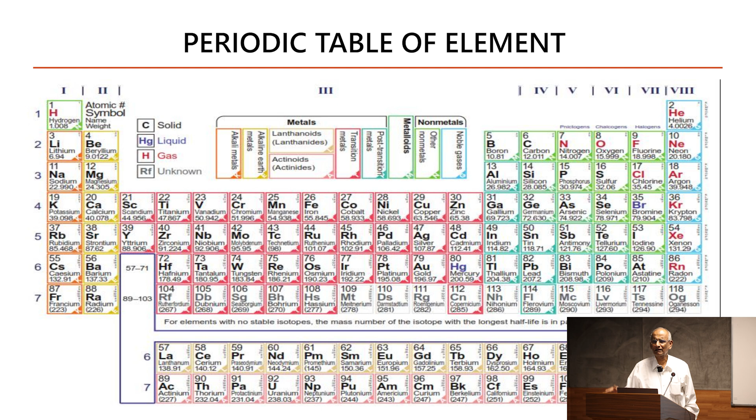Okay, now why I say that, give the periodic table - these are all the materials available, right? We were taught in college or PUC level that all the left sides are metals, right side are non-metals. Okay, next one. How does it matter to you?

In engineering, various materials have to be used, right? The material does not have any value if it is not used. You are sitting in the chair because it's built up of materials. So how do you select the material?

First, stability of the material in the given condition. You are sitting in the chair - it may have to carry a person of weight of 25 kg to 1.25 quintal or 1.45 quintal, right? Whether it has stability in the given condition.

Second, ability to withstand the mechanical forces from various sides. Third, suitability of the performance at the given temperature.

Why do I say specifically this? Okay, in your factory you may say, yes, this is the material I selected, so and so. You know, many guys, when they go abroad, they have a fancy of bringing many equipment or household active products to the country. Even now our white man's craze has not gone out fully, even though the government of India is trying to talk about quite a lot about patriotism.

So many of you go abroad, your house people, wife or girlfriend will say bring me that, bring me that. What happened? Those are all from cold places where temperature is very low. When it comes to India, it will not work. You have to show a bad face. So suitability of the performance at the given temperature - that is the most important.

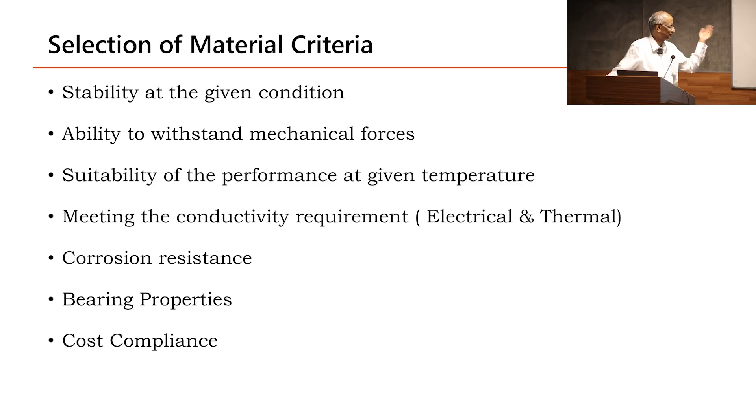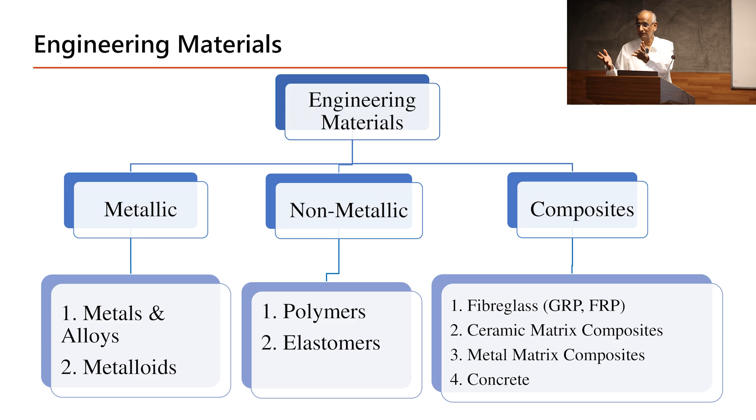When you talk about engineering materials, you have got both metallic, non-metallic, and composites. In the metallic, you have metals and alloys and metalloids. Non-metallic, you have got the polymers and elastomers. In the composite, typical example is fiberglass, ceramic matrix, metal matrix, and concrete. This is a very classic example of composite - you don't need to go anywhere else to see what the composite is.

Next one. See, why all this, you will understand - every material what we use is taken from the Mother Earth. Everything is available here. So the percentage I have given you is taken from some book or something like that - it may be accurate, it may not be accurate, but it represents the source by and large, right? These are all the metallic materials available.

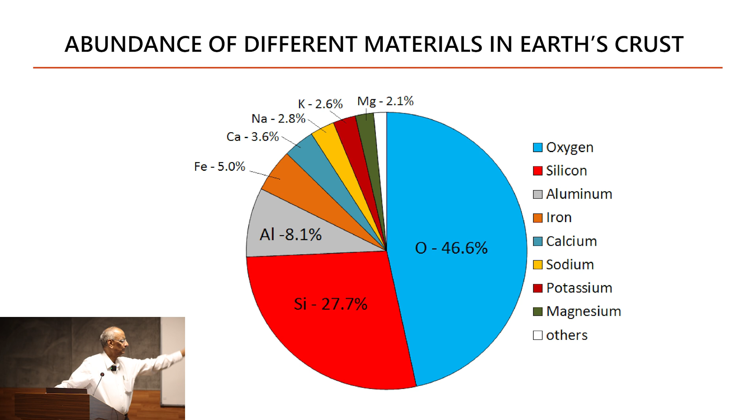Why did I give this? I will take you back to your school time, maybe 8th standard or 9th standard. Why I specifically do this is, do you remember what was taught in 8th standard, 9th standard? That is what I want to inspire you to recall, right? In the 9th standard, you find the definition of metal: any metal which is put in dilute acid should evolve hydrogen - that is the definition of metal. Probably the modern definition of metal would have changed quite a lot, but this is the one taught in school.

And what is the aspect of the property of the metal? Malleable, ductile, electric conductivity, thermal conductivity. Now you have got electronic properties, etc., etc., etc. These are all the basic things we were taught in schools. How many of you remember this? Everybody is sleeping - one fellow is yawning, another fellow is sleeping, right? That is the outcome now. Right, next.

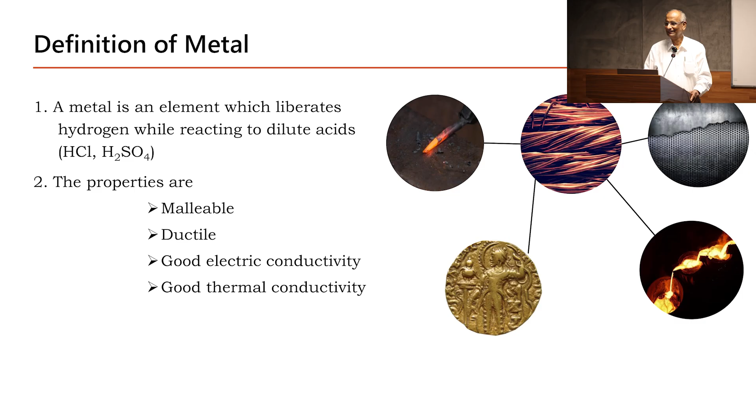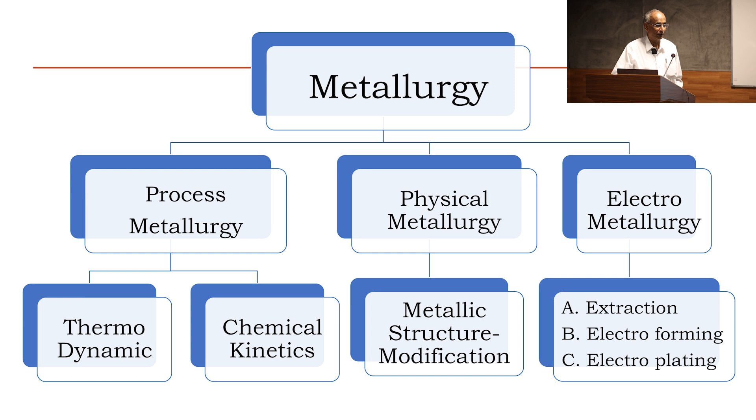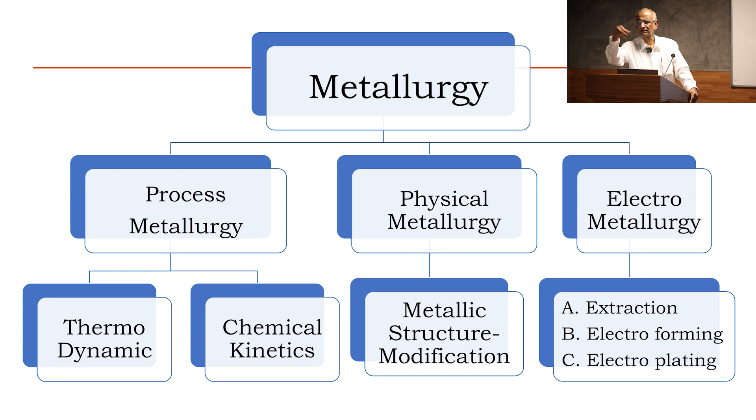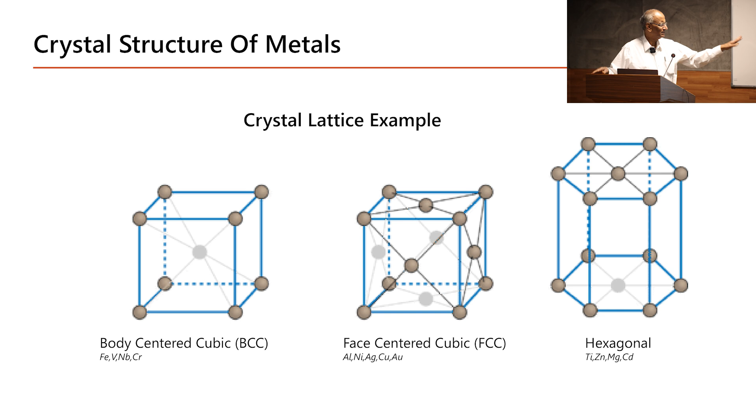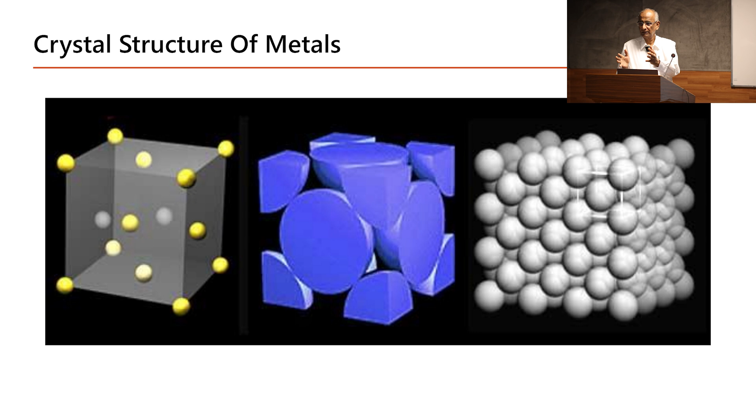Moment you talk about structure of the metallurgy, metallic materials, basically you have body-centered cubic, FCC, and hexagonal, and something more also, but this is the most popular one. This is what it looks like when you talk about the metallic structure, which is neatly organized.

See, this is what I want to do, because most of your industry guys will be dealing with iron-based material. Particularly, you have some lectures about heat treatment today, isn't it? Right? So most of the heat treaters will say quenching it, hardening it, tempering it, etc. These are all the words they use. They don't use the word of why it is happening - not many of them talk about that. And everybody thinks in the mechanical sense that when you heat to so and so temperature and quench it, it will become hard. No, that is not for all the materials.

So typically, normal iron has ferrite and austenite. I'll come to the ferrite and austenite separately when you come to heat treatment. When you have a heat treatment lecture, you ask him at the time, I'll give a small dose on that.

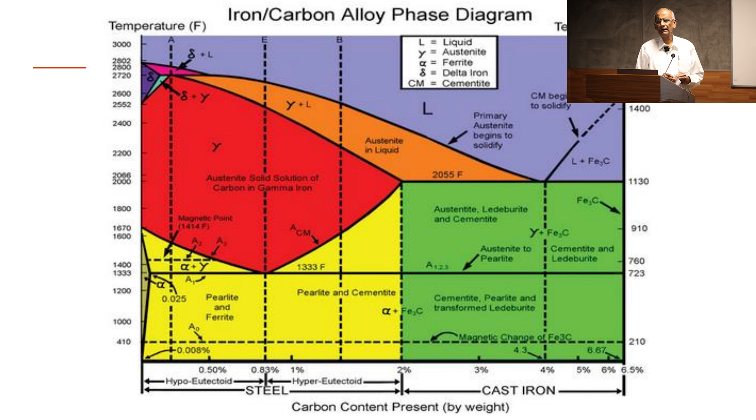When you talk about heat treatment, the heat treaters base it all on ferrous heat treatment, basically based on the iron carbon diagram. Anybody going out of engineering college, mechanical engineering also, will talk about the iron carbon diagram, particularly useful for understanding how which phases contribute to which one. Go back to the previous slide.

When you come to the iron carbon diagram, you hear so many words like pearlite, cementite, martensite, bainite, etc., austenite. These are all the normal terminology heat treatment people use. Why I am asking specifically - the guy who gives a lecture today in heat treatment, if you want, you can weave this into his heat treatment process.

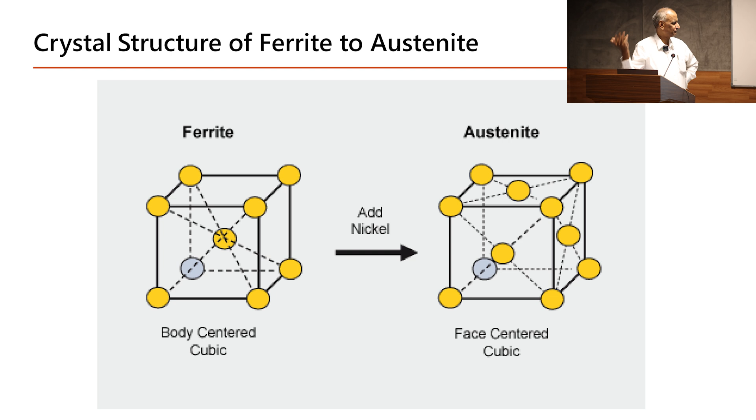For your information, austenite is a phase - when you quench it, it retains the high temperature structure, it doesn't get hardened. So the normal ferrous structure you have is ferrite and bainite, that is what gets hardened. Another one is formation of martensite. Each one has got a crystal structure - if you want, later you ask me, I will tell you.

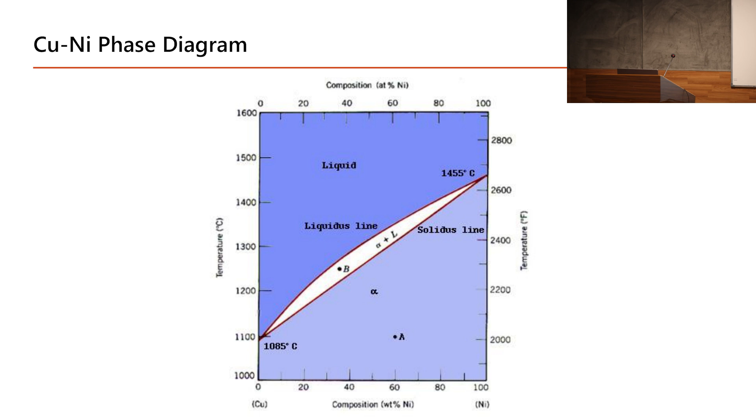So I'm typically showing something - for example, if you look at it, it is the copper-nickel system. Whatever you see here is the liquid area, whatever you see here is the solid area. So you talk about liquids and solids. I don't know how many of you remember, doesn't matter. So when you look at the solidified structure, this is the phase structure. You will have liquid, and it will mix uniformly or non-uniformly also.

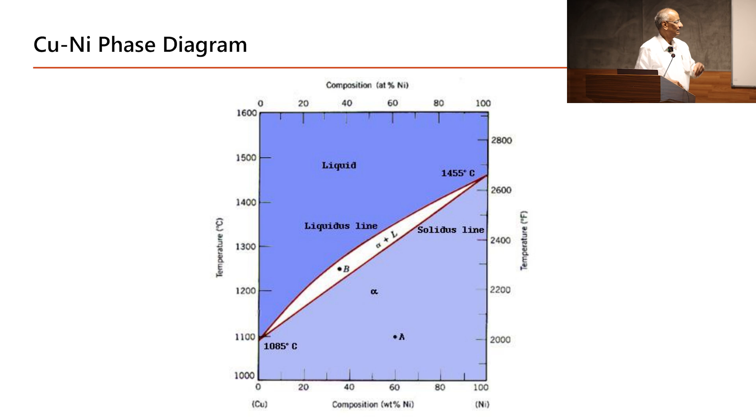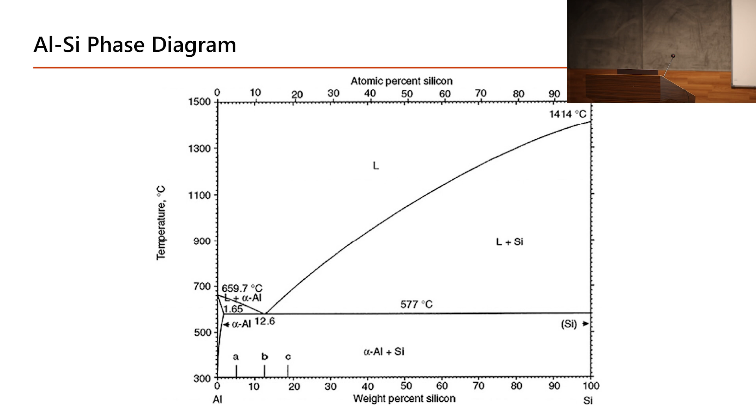And the earlier phase diagram I talked about was the iron carbon diagram - that talks about how the phase diagram decides what microstructure you will have at room temperature, and what type of structure you would like to have depends upon how fast you cool it, how fast you heat it, etc. So I talked to you about the iron-carbon phase diagram, and a totally mixable two-alloy system is copper-nickel, which I showed. This is another popular one, aluminum alloy, aluminum-silicon alloy, and this is known as eutectic - that is the lowest melting point.

What happens when you quench this alloy? From here you bring down the temperature, it will have that phase as well as this phase. Now with Google you can get the phase diagram of any material you have.

So whether these two materials will form an alloy, open the phase diagram whether available or not. That's all what is required. You got my point. I'll tell you one more example.

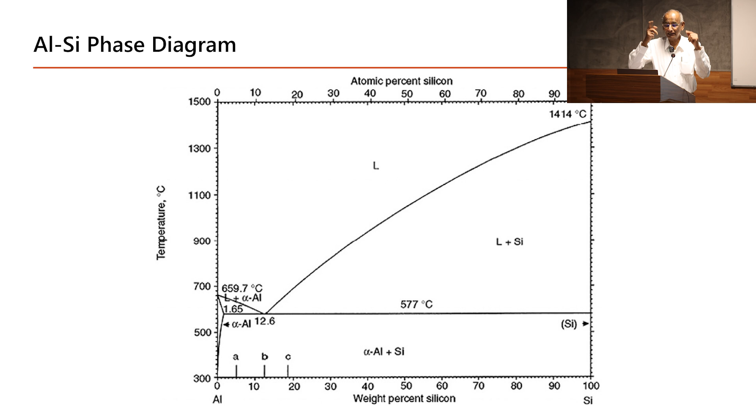In the aluminum foundry, when you go, they degas it. What for they degas? They remove the hydrogen, because hydrogen is soluble in the liquid aluminum, insoluble in the solid aluminum. So it forms the bubble. So what they do? They degas it with the nitrogen or chlorine. It forms a bubble and the hydrogen ions comes in the bubble and come out.

Why nitrogen? Nitrogen does not dissolve in the liquid condition as well as solid condition, so it is used as a purging agent. So this sort of common sense you should have. See, this is why I am telling you, this is all the basis. I don't know whether anybody talking about the foundry today. If it is there, you ask that question.

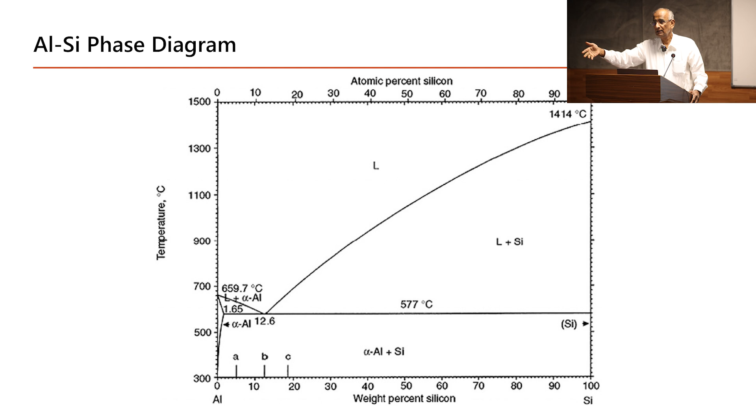So this is if you go to the foundry, somebody using so and so, this is the purpose. And many times they use the argon, but argon is very expensive. They use the nitrogen or chlorine, whatever it may be. Go to the next one, right?

So you get into the two normal terminology, is quenching and age hardening many times. What is age hardening? When you, this sort of a thing, you add some magnesium silicon forms a small precipitate. As the temperature increases, it grows into the microstructure and becomes stressed, so it becomes age hardening. So this is all basically because of the movements of the atoms or the precipitates which various take.

When somebody talks about heat treatment, talk to them about what is martensite, why it's happening like that. Okay, if you quench the aluminum, nothing is going to happen. It's not going to become hard or anything like that. It is only high temperature structure it's going to maintain. Okay, next, go to the next one.

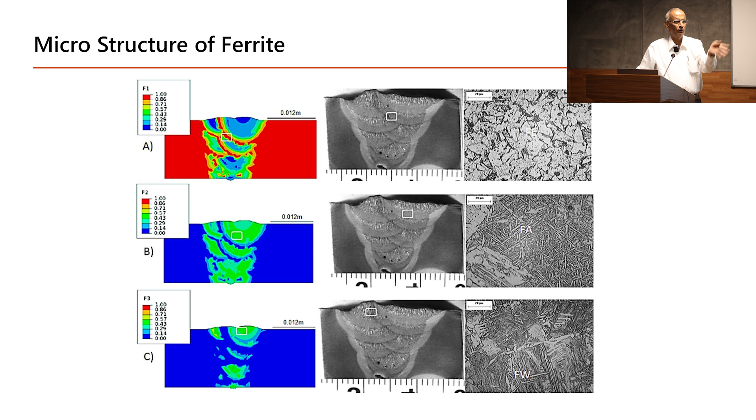These are all the different types of the microstructure. What, as I told you earlier, in the iron you talk about the ferrite, austenite, etc. That structure is like this.

There is a Professor Avik, a fund of knowledge, internationally recognized great man about the microstructure. And for him, you tell various elements and the composition, he will tell you what microstructure is going to be. He got a model, a very great man. Later, when you want to interact, you can come to him, provided he has got time.

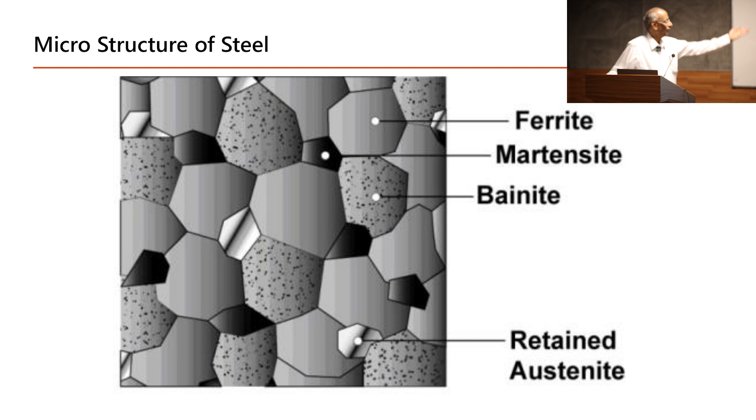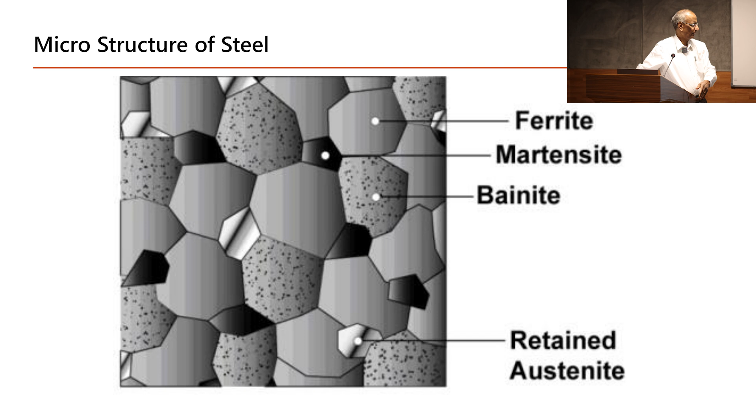Am I right, Avik? Next, okay. See, for you to read what looks like ferrite, what looks like martensite, what looks like in the microstructure, you talk about nearly about 800x magnification, right? You see all this. What is retained austenite, etc. Go to the next one.

Typically, aluminum silicon microstructure, what I told, magnesium silicon system precipitation. Next one.

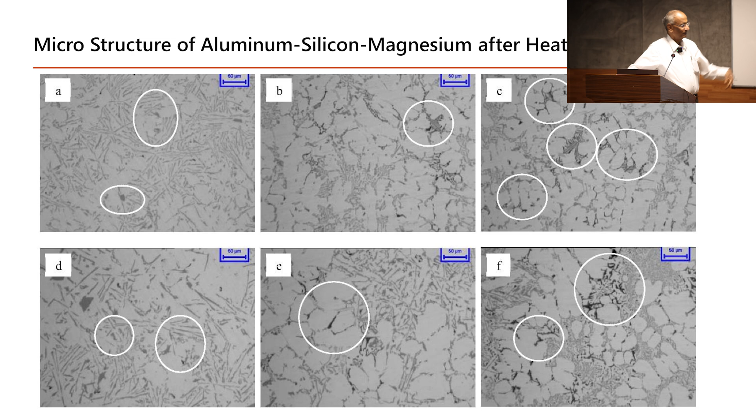In the modern time, in the iron, you have got, very often you hear duplex steel. See, normally you hear about what? MS and mild steel and various low alloying steel, EN8, EN24, etc., etc. You have some ASTM specification.

Then you come to stainless steel. Stainless steel, as a definition, it doesn't form a stain, it doesn't get corroded. There, again, stainless steel you have austenitic stainless steel, like 316 and 304, martensitic stainless steel. So for you to understand simply, any 300 series, this thing, austenitic stainless steel. So when your boss says 300, when he takes the 400 series stainless steel, you say no. The 300 series is austenitic stainless steel which can't be heat treated. 400 series is the martensitic stainless steel, can be heat treated and get into the various hardness.

And the third variety is available, duplex steel. You have ferrite and austenite mixed together. It is highly corrosion resistant. When you talk about corrosion, I'll tell you there's one PREN number, just remind me, I'll explain to you at the time. Highly corrosion resistant, high strength, etc., is a cost compliance.

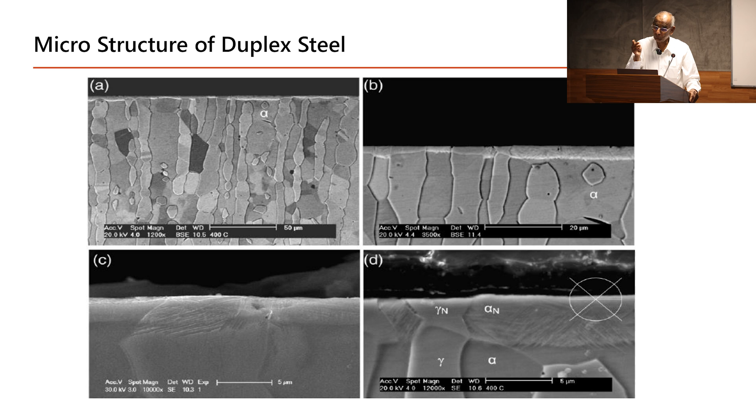Now a lot of laboratories are there, you go there, here they give microstructure, right? Go ahead. And some laboratories really qualify, somebody may not qualify, because the qualified man would have gone outside in the day. Next one.

Now you have modern materials like titanium, which you would not have heard about 25 years back. See the structure of that, various microstructures should thrill someone who is interested in microstructure, seeing the various patterns. You should be able to predict what type of outcome and what type of properties you can expect out of it. Go ahead, next.

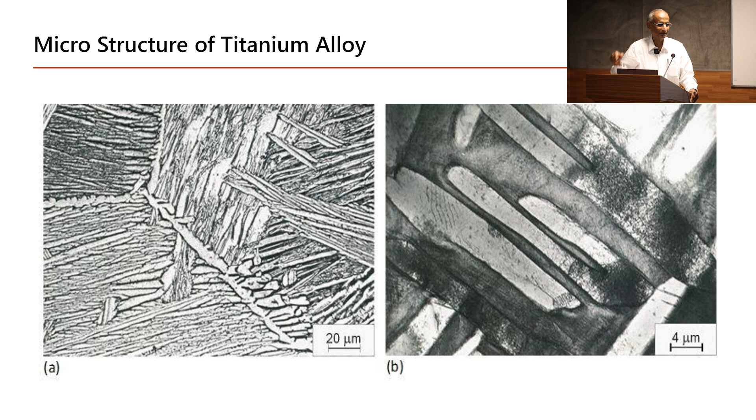Various types of microstructures for you to see. Have a look at that. Go ahead.

Next, okay. Now coming to the engineering operations, various things that engineers basically do. Casting you have, welding you have, metal forming, heat treatment, machining processes, advanced manufacturing processes, forging, extrusion, additive manufacturing, electromachining.

Additive manufacturing, PVD, and injection molding of metal. I will just take about 30-40 seconds on each one of these. Casting, as you know.

You melt the material, maybe pure material or alloy, whatever composition you want, and you use what they call a grain refiner and degassing, whether it is copper, then pour it into the mold.

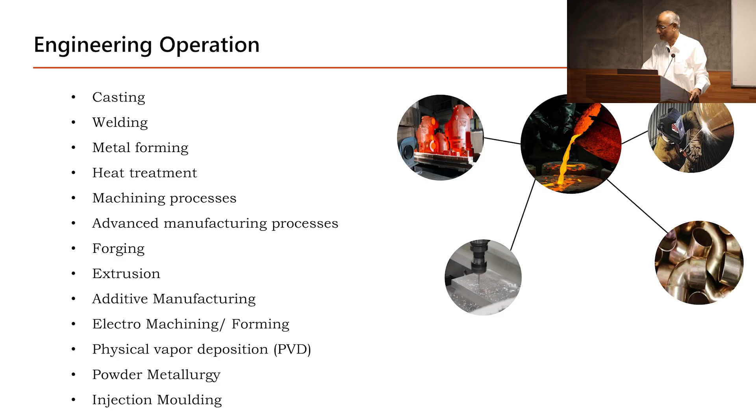Now the engineering operations, as I already talked to you about - sand casting, permanent mold casting, investment casting, squeeze casting. Squeeze casting, I don't know how many of you have heard of it. If you have doubt about it, ask me later during tea time or coffee time. So what is it that you expect? You expect a defect-free casting. This is in that order.

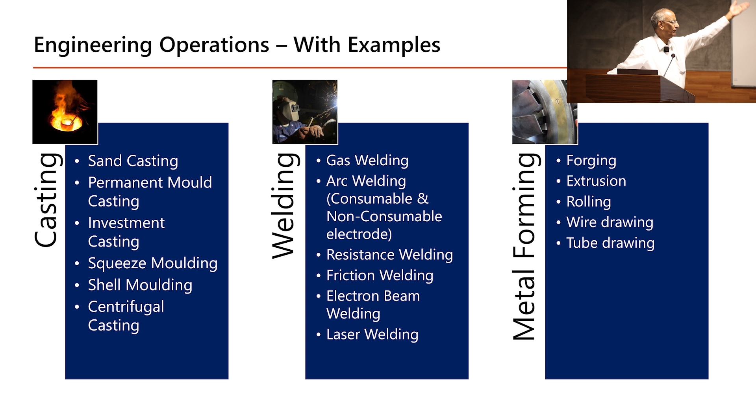Centrifugal casting - how this uses centrifugal force to splash the liquid metal one layer after another, so that the cooling time is very fast, giving a good microstructure with very little defect. A variety of welding processes I have given there. Forging also, at the other area of metal forming, is given. Next - but just keep on looking at me.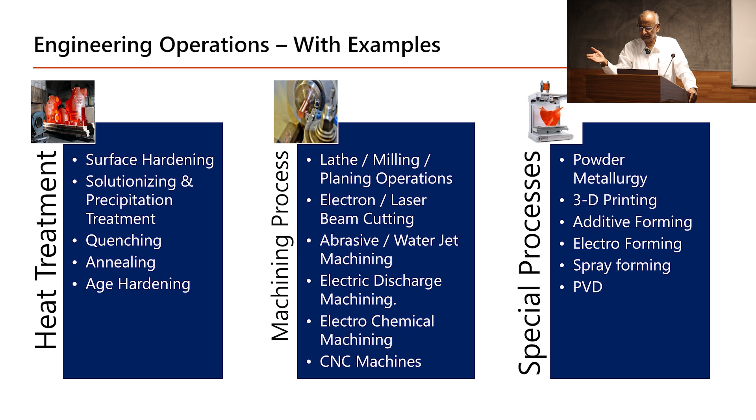There's one more thing I missed until now - spray forming also is there. Somebody is talking about metal spray, isn't it? Ask them those questions. Thermal spray - you'll understand that it's a new technology.

The normal metallic materials - whenever you talk, these are all the values you talk about: what is ultimate tensile strength, what is the elongation, whether it suits me or not, what is the hardness where I require it, whether it gives enough abrasion resistance or wear resistance. Fatigue - how many of you know the terminology fatigue?

One, then two, good. Fatigue is a very important terminology. You know, when you run, initially you'll run very fast, then you become tired - that is known as fatigue. It's a metal fatigue, a tiresomeness of the metal, particularly in terms of alternate stress and strain - the fatigue will be aggravated. Is somebody talking about fatigue today? But you are talking, I see. So especially in rotary shaft designing, etc., the fatigue factor should be taken into account both by mechanical design as well as endurance tests.

Right, fatigue. Creep - how many of you know? Creep, good, it's a time-dependent deformation. The day when you put it, you will not see it immediately. This you see very often - many people in the house put a thin wire for drying clothes. After some time, it will keep on sagging. That is creep - a typical example I'm telling you. Then electrical conductivity, thermal conductivity, etc. You missed the temperature - yeah, that's true. So these are all the normal engineering properties which you have to think about.

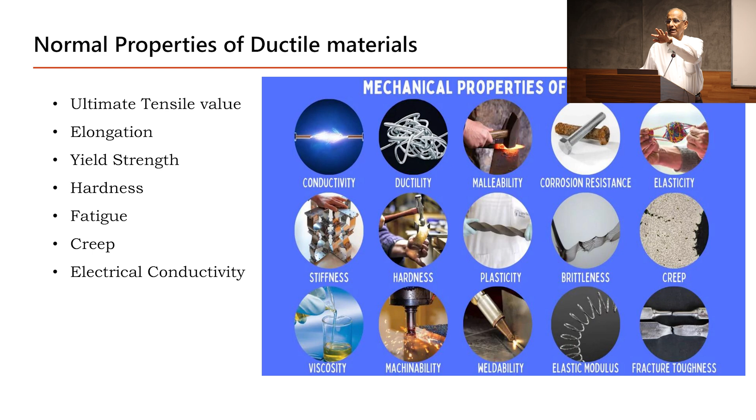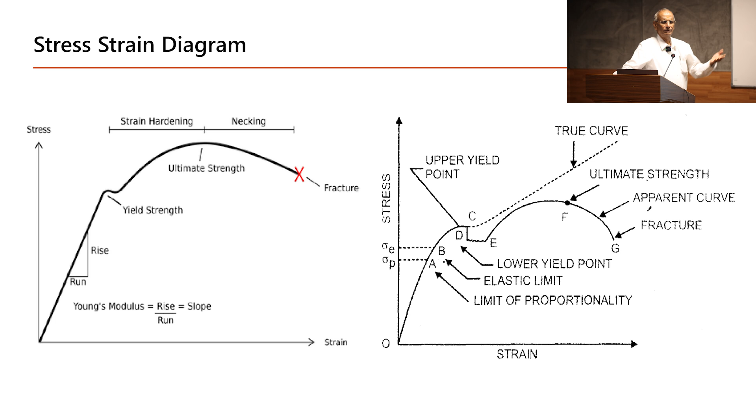Typical stress strain diagram, I want you to have a look at it. Many materials, when you select for your application, calculate the load, whether it's suitable or not. Earlier we had to run to the books to get the stress strain diagram. Now everything is available on Google. Please utilize that for selection of materials. By and large you all know, but read it.

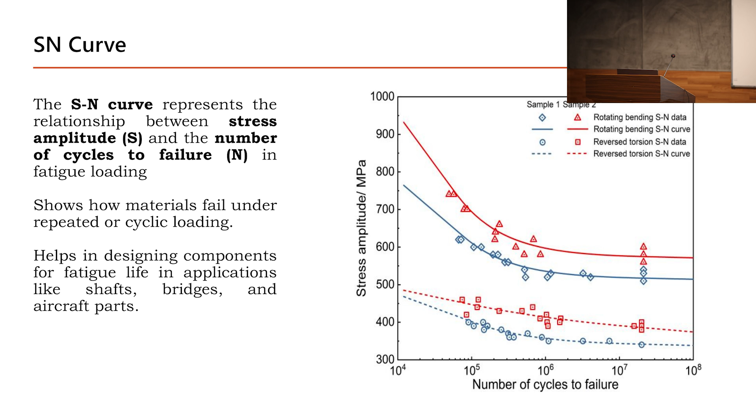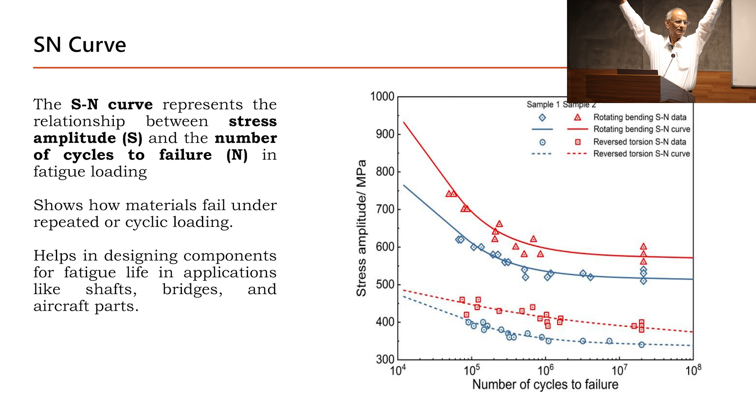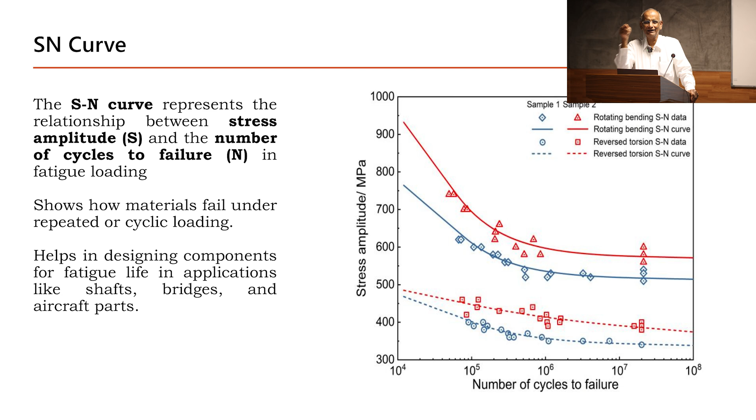This is about fatigue, an interesting curve. I want you to remember the name, SN curve. If your operation is below this, fatigue failure will not be there. If it is above this, fatigue failure will be there. Then go to the internet and read all that. Normal mechanical engineers coming out of college, when I interview about 100 guys, I ask about the SN curve, and the answer is blank. So please refer to that. Very important curve, easily available now for you to know whether you are safe from fatigue failure or not. Fatigue: number of cycles, alternating stress and cycle.

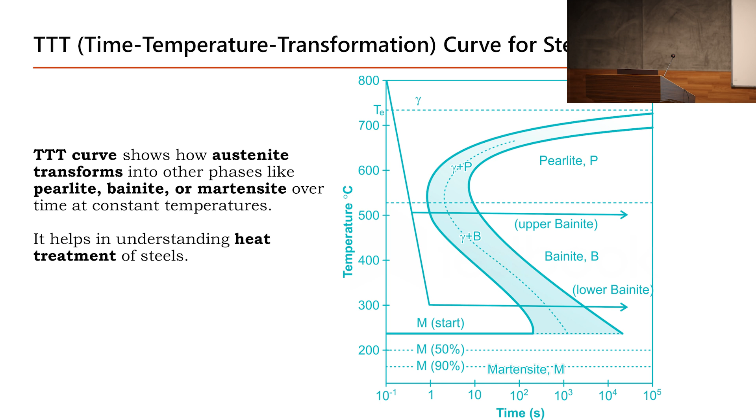Afternoon heat treatment, who talks about it? Especially for iron, whether it's the TTT curve, whether it's quenching. When you come to quenching, you go through the phases, ask about it, and read the books.

Not only human beings and animals, metals also have a memory. That is why we have shape memory alloys. You can design a metal in a particular combination so that at one temperature it has this shape, and at another temperature it has another shape. Many aerospace items, at a slightly higher temperature, fit very well, and at lower temperature you can assemble them easily. So these are all shape memory alloys. During those days, we never heard of it.

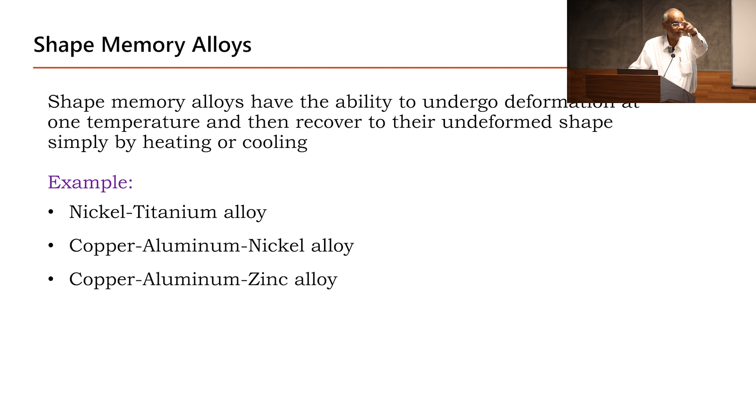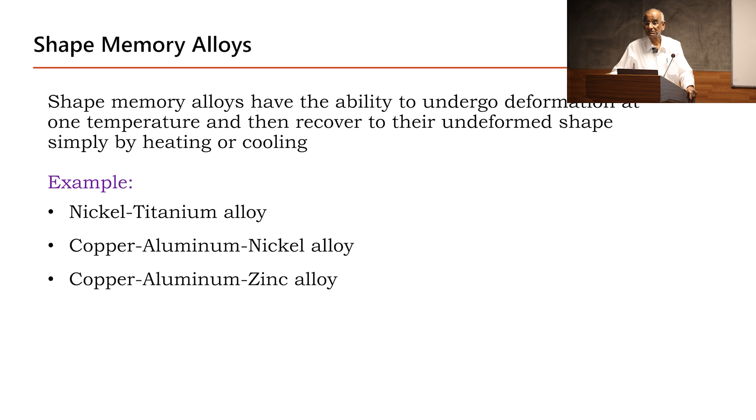For our project, Abhik, NAL Krishnan, when I started the foundry, used to come and ask me about the copper thing, shape memory alloys. I never understood it fully, I made the alloy and gave it to him, but this is basically what it is. Now you have nickel titanium alloy, copper aluminum zinc alloy. These are all shape memory alloys, you can go through that.

You have another material, electronic material. What is inside your ICs? What is inside your SCR, diode, etc.? In fact, I could give a 1 hour lecture on that, but I have not prepared it, the time doesn't permit it. Understand that, I'll just give a typical example. These are all modern materials, which I don't know how many regular mechanical engineering classes talk about. Not really, isn't it? So at least you should hear the name, so that you are not left out.

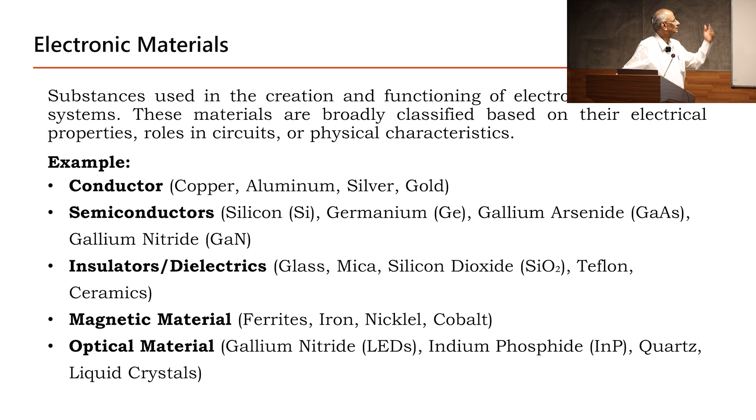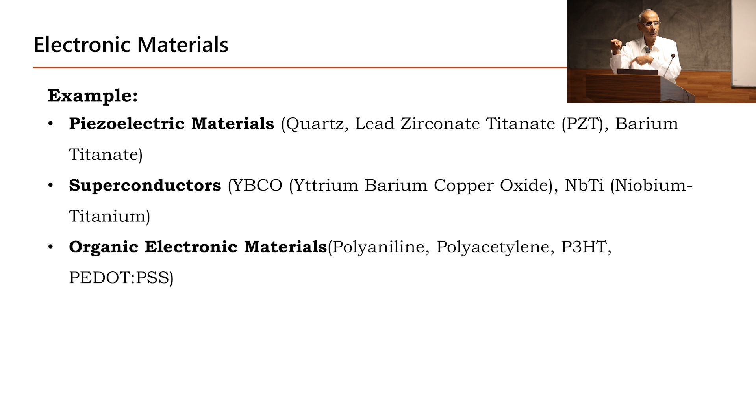Electronic materials, I have given piezoelectric material, superconductors. Very often you hear of a very towering personality, C.N.R. Rao, who talks about superconducting at the Institute of Science quite a lot. He got his Bharat Ratna and other honors for superconductors. It's used in your MRI, when you go to the hospital and lie down and somebody takes a picture, that uses a superconductor. Go through the internet later.

Nanomaterials. See, the way nanomaterials behave, compared to the normal material, the microstructure or powders have a totally different behavior and properties when ground to the very fine nano size scale, that is nanomaterial.

Many nanomaterials have a conductivity more than gold. I'll give you one typical example which normally metallurgy professors would not like to talk about.

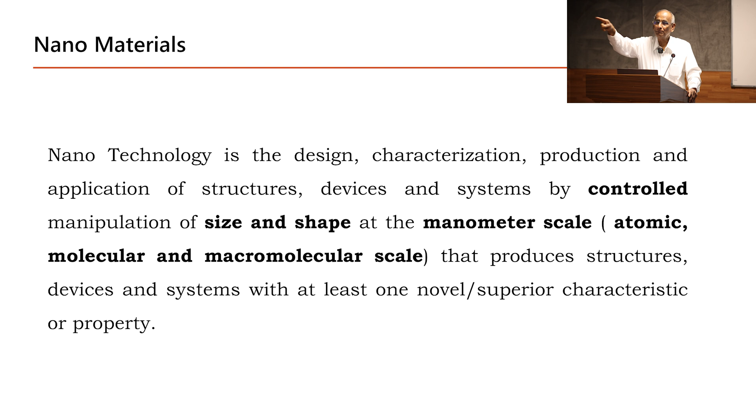Mercury, you all have heard of it, isn't it? In Kannada it's known as Rasagundu or Padarasa. The allopathic doctors say mercury is poisonous, it will kill you, etc., they terrorize you about it. But when you go to traditional Ayurvedic or Siddha Vaidya, they use solid mercury, Rasagundu. What is this solid mercury? They keep grinding it down to the nano level, and that has a lot of medicinal properties and becomes solid. So don't tell me nano was never talked about in those days, it's all available, some of it documented in the literature. This is a typical example. Go into the details and realize we had done something along these lines in those days.

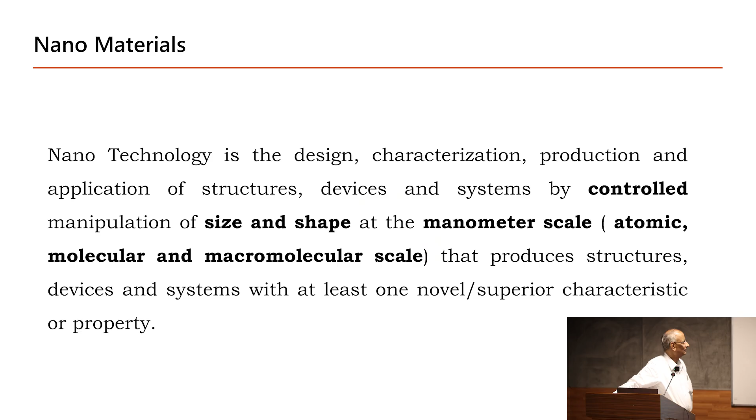Types of failures: overloading, brittle failure, failure due to fatigue, and stress corrosion cracking.

Again, if we want to talk about this... are you talking about it? Okay, stress corrosion cracking, right. Next time let them come forward, but I want to give a corrosion seminar one day. Okay, see, stress corrosion cracking.

Many times mechanical engineers will not know why something has failed, especially when corrosive agents or liquids are involved, stress corrosion cracking takes place. Also hydrogen embrittlement.

What material are sea-going ships made of? Any idea? How many can answer? The sea-going ship hull, what is the material made of? Iron, sir. Correct, it is ordinary MS, mild steel, and protected by so many methods.

In one of the protection methods, hydrogen evolution occurs, and the hydrogen can get into the microstructure and crack the material. This is hydrogen embrittlement. There is also failure due to corrosion and failure due to abrasion.

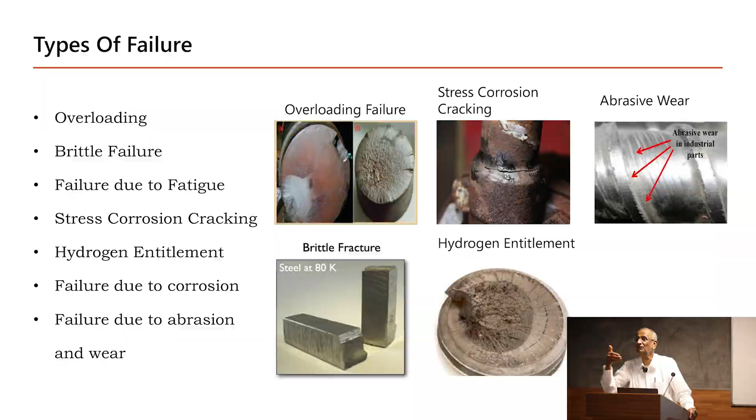Why am I introducing all this terminology? Because when you come across these failures, you should be able to recognize them. You understand? That is the reason. Next.

I talked about corrosion basically because this is a subject which is very dear to me. Though this person said don't talk about it, I will take only two minutes, okay, because this subject is very dear to me, and many industries utilize this.

Definition of corrosion follows our Rigveda: all materials come from earth, but naturally would like to go back to earth, including the human body. So that is the definition of corrosion.

It is defined as the degradation of the metallic material by chemical reaction with the environment. Corrosion can never be stopped, it can only be stifled.

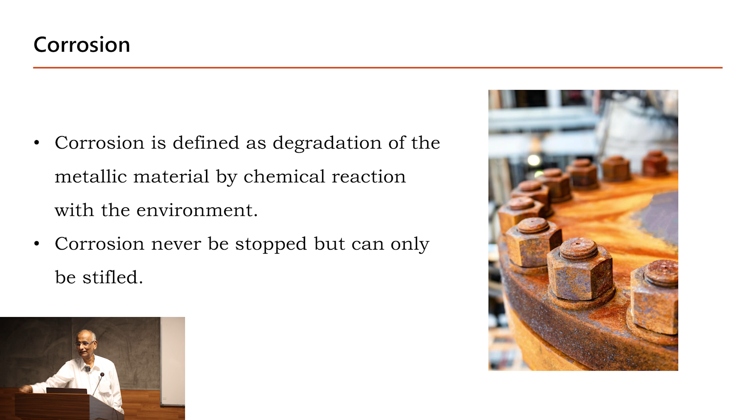Why do I say specifically corrosion? When I asked in an interview with a mechanical engineer, what do you know about corrosion? Rust, that's all, the matter ends there, right? So every metallic material undergoes corrosion when exposed to certain environments, a chemical reaction takes place, and you have to protect it.

Go further, how do you stop corrosion? One, by selection of material, like gold or platinum, which will not get corroded normally. But you can't have everything made of gold and platinum. So how do you prevent corrosion?

One way is to isolate the surface from the corrosive environment, like painting, plating, or some other treatment, covering it. What we do with dress, when we wear clothes, our body is not getting corroded, otherwise there would be chemical reaction. Our shirt and pant are the corrosion protection area. This is isolation from the environment.

Then I used the word cathodic protection. Whenever water or liquid is available, corrosion takes place wherever that occurs; it is known as anode.

I'll tell you again, in 8th or 9th standard your teacher would have taught you one subject, the voltaic cell. How many of you remember? Nobody? I thought only after going to college you get distracted by something else, but even in school you get attracted to something else. In 9th standard you have what is known as voltaic cell, they show.

One copper electrode and one zinc electrode kept there, nothing will happen. Connect it, zinc will get consumed, copper will be protected. So why is copper protected? So long as zinc is there, copper is protected. That is cathodic protection. So if any structure is getting corroded, convert it into the cathode and it will not get corroded. That is known as cathodic protection.

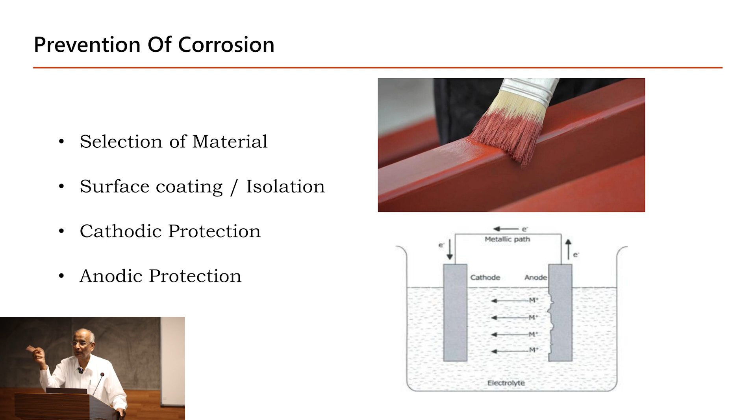I don't want to get into details because the subject is very dear to me. Similarly, you have anodic protection, wherever sulfuric acid comes, you utilize that.

Next one, next, thank you. Right, anything else? You can ask me later. Thank you, so nice of you. Thank you for your patient hearing.

I don't know if this last 25 minutes has been useful to you or boring to you? Pardon? Yeah, but majority say it's boring, only a minority found it useful. Thank you for a patient hearing. Anything later, probably in the panel discussion I'll answer you. Thank you, so nice of you.

Can I take one or two minutes more? No, I'll be eating into others' time. Right, thank you, so nice of you.